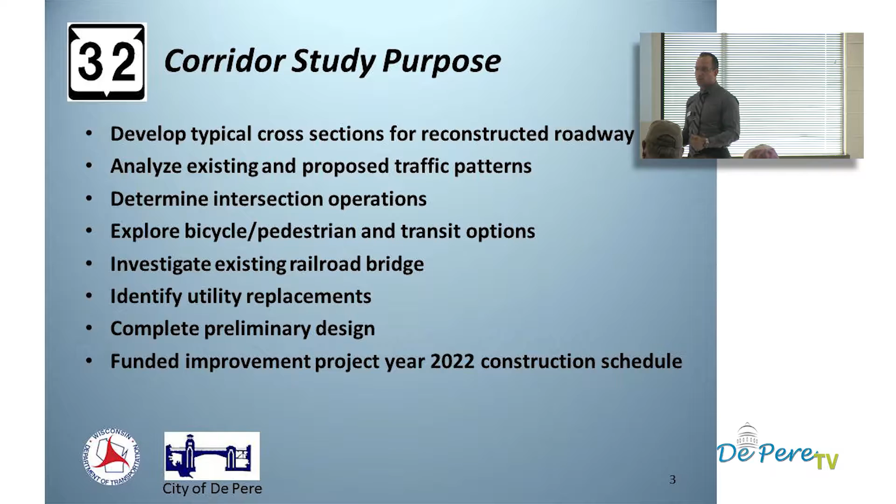I put this slide in here to identify, in an overview format, what we have done so far, just to gather some input. Because a complex urban design and transportation design in general has a lot of facets and a lot of stakeholders that we ask to walk along with us, and in order to find the right solutions, we have to incorporate a lot of their input, especially in a long-term reconstruction project like this, that we're expecting to last for a good long time. So the intent of the slide is just to remind you that there are trade-offs associated.

Go ahead, Brian. Can you kind of just read around the... Yeah, no problem.

Some of these project considerations we wanted to talk about are like the issues I mentioned when discussing why we needed this study. Parking is a lot of value, real estate impacts we have to have a good handle on, traffic operations, downtown identity, like when we talk about the railroad bridge potentially being a gateway into downtown, bicycles and pedestrians. The city has their bike plan that we should definitely consider in our transportation improvements. We have safety issues, we always try to do a 5-year crash analysis to hammer down the contributing factors to each crash. We definitely look at costs and livable community. We know we've got a mix of residential with our business district downtown, so we have to really consider the users in this.

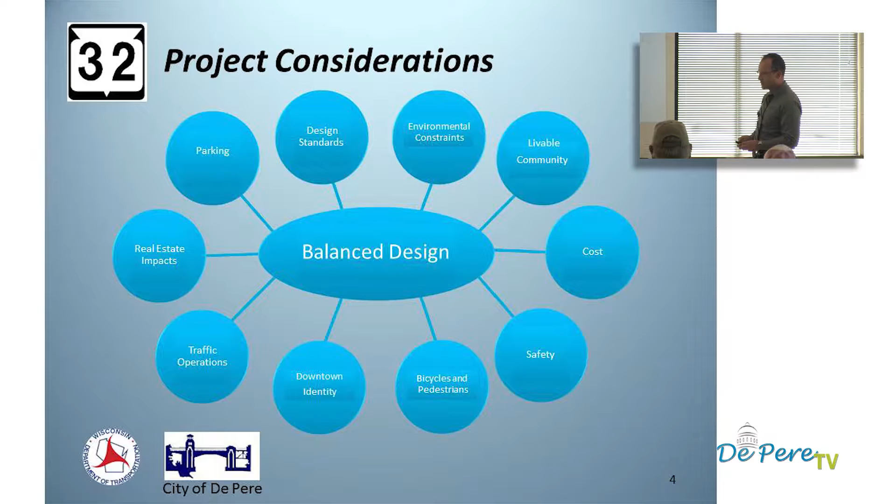Then we've got environmental constraints. There's always going to be issues like hazmat, issues like parkland, which is publicly owned land that maybe the city owns or things like that we have to consider. And then design standards: we have to make it safe for the design speeds, safe for trucks. It's a trucking corridor, so we have to meet lane widths and other design factors as controlling criteria. Combine them all, sometimes they compete against each other and sometimes they all line up, but either way your goal is a balanced design that serves the public in the best capacity.

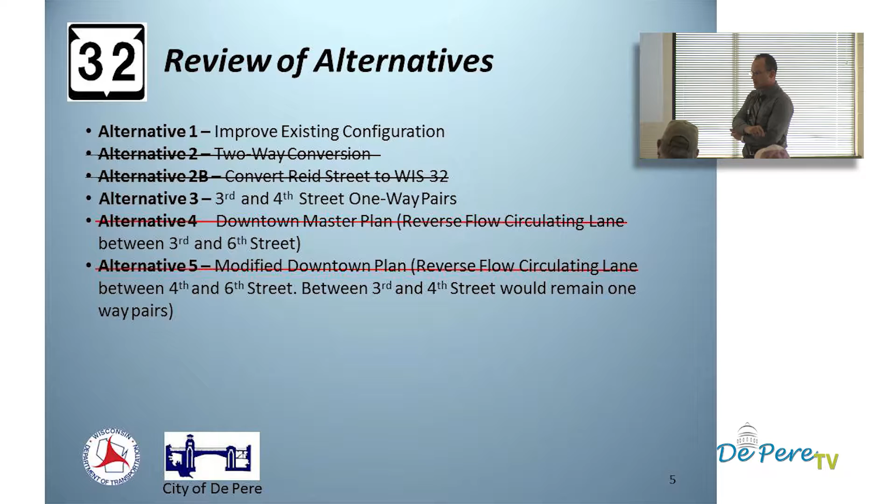When we came out to you last time, after the study kicked off in 2012, our first public information meeting was held in March of 2013, and we introduced the 5 alternatives that would be considered as part of the study. Alternative 1 was improve the existing configuration. Alternative 2 was a 2-way conversion of Main Street to Highway 32, with Reid Street becoming a local street. Alternative 2B was convert Reid Street to Highway 32, with Main Street becoming a local street. Alternative 3 was making 3rd and 4th Street one-way pairs.

In other words, northbound traffic would utilize 3rd Street, and on 4th Street, southbound traffic would primarily occur as a one-way. Alternative 4 was a downtown master plan showing a reverse circulating lane, trying to get one lane of traffic in the block between 3rd and 6th. Then we had the modified downtown plan, where the reverse flow lanes were only between 4th and 6th Street, and 3rd and 4th between those streets would remain as one-way pairs.

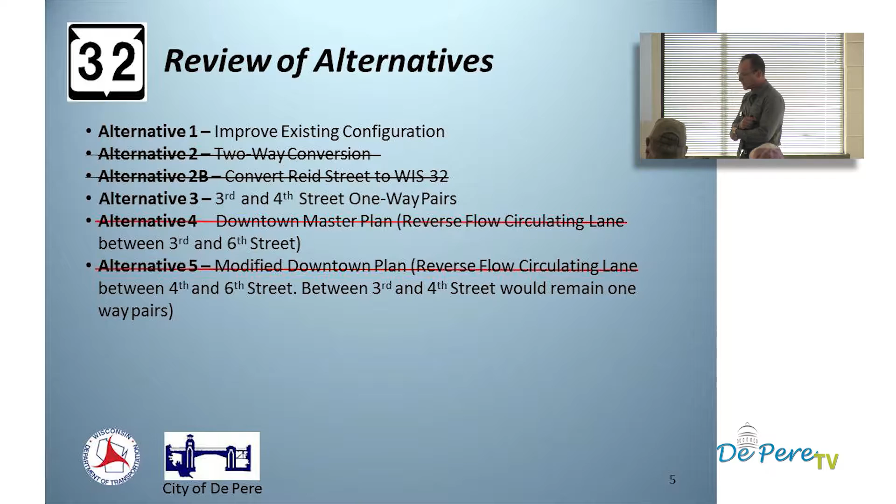I apologize, the slide did have the removed alternatives crossed out, so let me step through those with you. Alternatives 4 and 5 were recommended for removal after further study and stakeholder discussions, followed by a planning commission meeting in August 2013. It was decided primarily because of safety and operational concerns—alternatives 4 and 5 removed too much of the on-street parking compared to the other alternatives presented. The impacts were also pretty great, as there was some real estate needed as far as buildings went. That's when alternatives 4 and 5 were removed.

Then in October of 2013, after more design work, we met with the Planning Commission again to present the 2-way conversion of Main Street. At that meeting, the Planning Commission recommended that we remove alternative 2, converting Main Street to a 2-way roadway and making Reid a local street. However, when they dismissed that alternative, they came to us with a secondary proposal they wanted us to investigate: converting Reid Street instead to the Highway 32 corridor and vacating Main Street back as a local street.

So from the time we met with them in October 2013 until we went back in February, we had alternative 2B on the table. Then, in February of 2014, which was our last outreach with the Planning Commission, Alternative 2B was presented and had equally high impacts on Reid Street by converting it to 2 lanes. I believe a lot of the intersection at 3rd Street had significant real estate impacts.

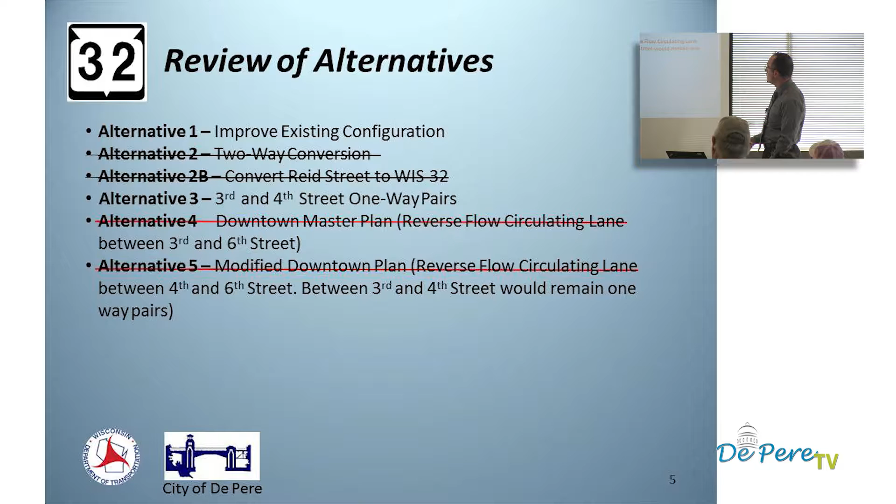Oh, this is the slide, sorry. This is the better one. I didn't realize that I inserted both of them, so I apologize. But this one shows that they've all fallen away except for alternative 1 and 3. So I'm going to give you now a good overview of what alternative 1 and alternative 3 are.

When we say the study segment starts on 8th Street over to 3rd Street, I just want to stress that the alternatives are primarily between 6th Street and 3rd Street, where we're in the one-way pairs segment. So tonight I want your comments primarily for the alternatives analysis to be reflective of which one you prefer.

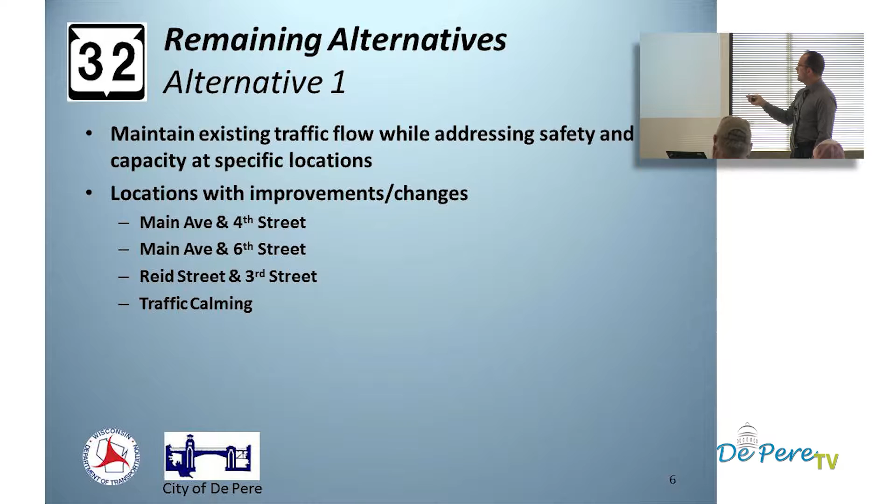Alternative 1 or alternative 3 - we're calling alternative 1 maintain existing flow while addressing safety and capacity at these intersections that have some issues for operations. Those locations I'll spell out: Main and 4th Street, Main and 6th Street, Reid and 3rd Street, and the concept of traffic calming that I'll go over.

So basically, operations, as I step left to right, we are proposing at 6th Street to add a left turn lane that does not exist today to the intersection for operations. We're proposing, I believe, another left turn lane that does not exist today at 4th, and I believe there is a right turn lane that is proposed on 5th and Reid.

I believe there's a left turn lane in 3rd to 4th Street that is proposed, because this segment between 3rd and 4th has the most operational delay on the corridor. You'll find that when left turning vehicles or vehicles headed northbound come through, particularly in the AM peak, the backups are quite considerable in the 3rd to 4th Street segment.

So in improving general operations, those are the turn lanes that are added. More specifically, another feature we're looking at is narrowing the lanes. Currently they're 12 feet, we're going to narrow them down to 11-foot lanes.

We're going to do some features called bump outs at pedestrian crossings that give a visual feel of narrowing the roadway a little bit. Parking lanes are narrowed slightly throughout the corridor. Currently, Reid Street and Main Street have uniquely different typicals.

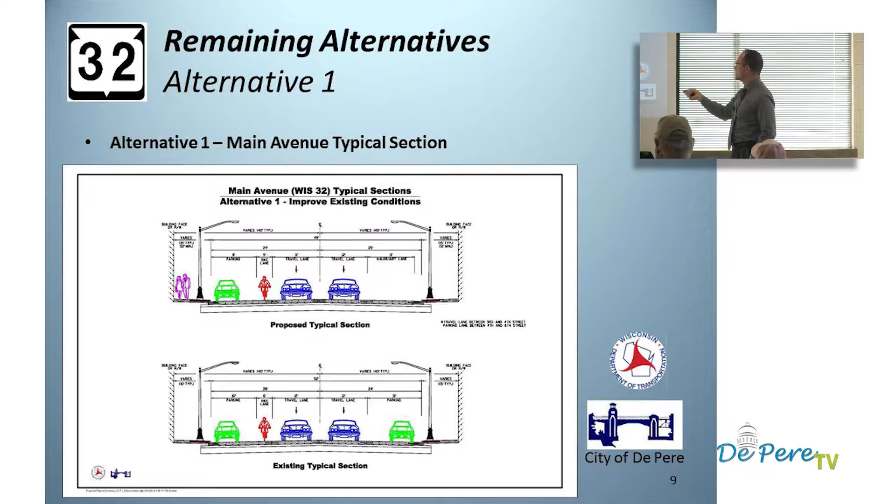You can kind of see, if I pull it up, I'll go back to that slide. You can see one has a 52-foot existing - this would be Main Avenue - and we are going to go down to 49 feet. So we're definitely narrowing up the roadway. And then Reid Street starts out at pretty much the same, it's 46 feet, so that's more in line with what we need.

Right now, Reid Street does not have bike accommodations. Because of the one-way pairs, we do want to get bike accommodations on Reid Street also, and there's enough right-of-way to go ahead and do that as well.

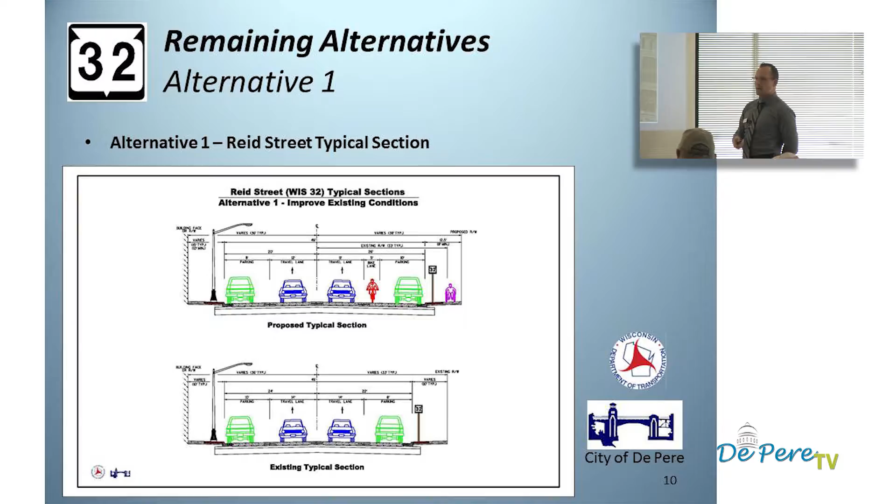So another unique aspect of the improved existing conditions is a conversation that the city... I'm going to answer questions. I just have one question, I have to leave for another meeting.

Okay, I haven't seen it on any of the drawings - have you figured out the possibility of putting angle parking on the streets? Because the way I pace it off, I think you could get another 2 to 3 cars on each side.

I don't know that we've had angle parking on a state trunk highway. I don't know where... well, it's still not just a city trunk highway, it's the main drag. Brian, why don't you continue the presentation? Okay, I'll get his name and number and we'll follow up with them on the phone. Thank you, Mark, I appreciate that. Okay.

In outreach with stakeholders, one was the Expera Mill. The city and study team have had conversations on operational improvements at 5th and 6th Street that would be part of the improve existing conditions alternative. Right now mill traffic comes up 5th Street and enters right here, which creates some backups and concerns.

There's a left turn lane being installed on 6th Street that could improve overall circulation if the mill works with us to take their access back off of Fort Howard, 6th Street, a bit north of the intersection. This would primarily become a driveway for adjacent properties instead of a through entrance for mill trucks and employees cycling in and out during shift changes, which greatly affects through traffic and operations.

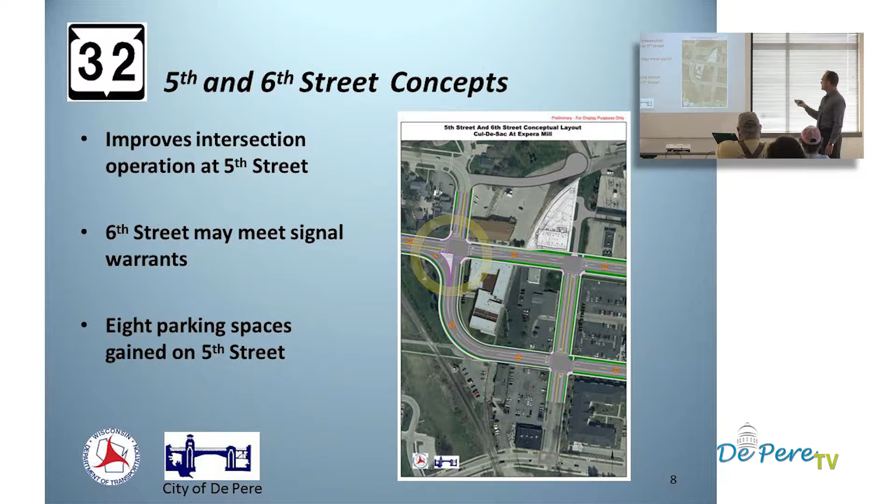The intersection of 3rd Street was also evaluated for signalization, primarily due to pedestrian movements. But that is more related to the next alternative, so let me skip ahead.

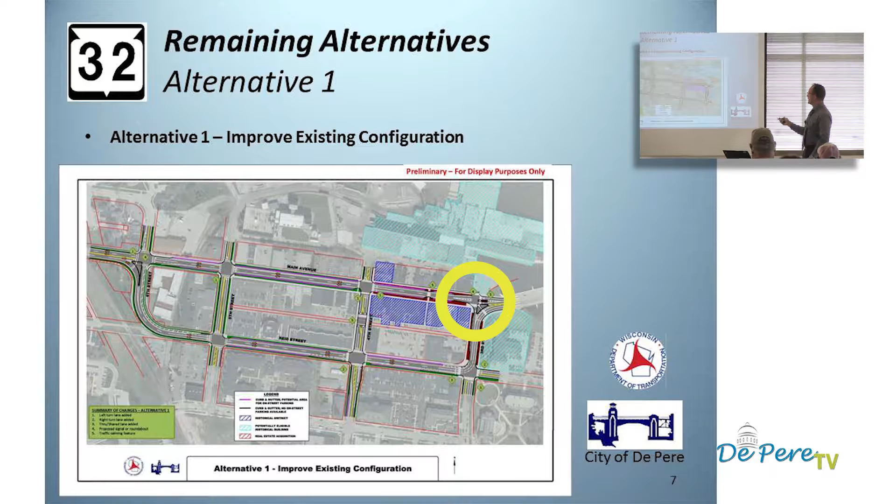Those operational improvements are primarily what would occur through the reconstruction segment. No other traffic pattern changes would exist with Alternative 1.

Alternative 3, however, is improve operations and safety within the existing footprint, but with some directional changes in traffic: 3rd Street would become one-way northbound from Grant to Main, and 4th Street would become one-way southbound from Main to Grant. There would still be the same improvements at Main and 6th, Main and 5th, Reid and 5th, et cetera, along with the same traffic calming measures like bump outs and lane narrowing.

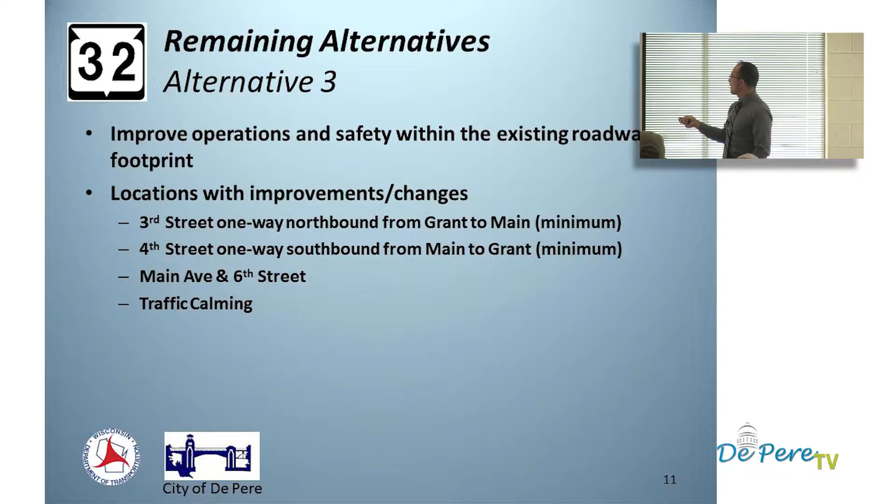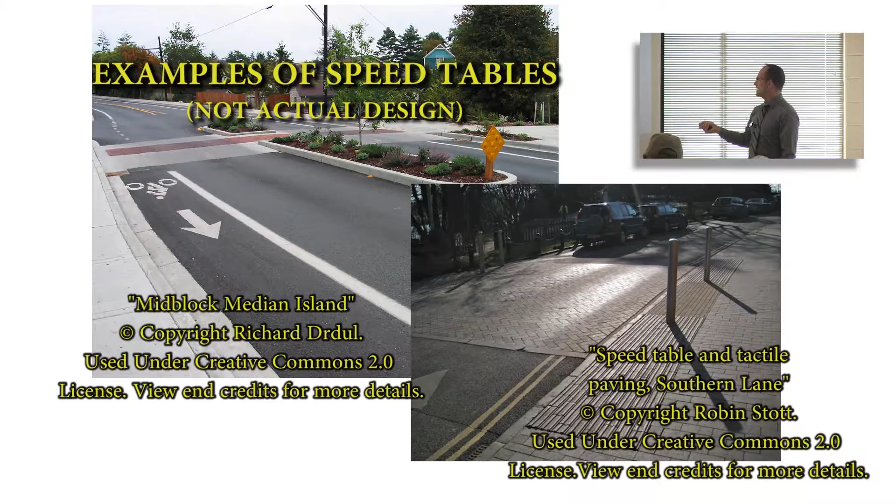The city is also thinking about installing what's called a speed table. You drive up over it, and it makes it harder for traffic to accelerate faster than the posted speed. It's also a better location for pedestrians to cross that busy alleyway that goes between 4th Street.

With these traffic pattern changes on 3rd and 4th Street, we have to consider what they mean for overall operations and safety. First, they make it a lot easier for pedestrians at the Main and 4th Street intersection. You'd still need this turn lane operationally, but because there's no longer a northbound cycle coming up 4th Street, it would improve operations in this segment, which currently has many delays and pedestrian safety issues.

One pedestrian safety issue: currently the crossing is right here, and there have been near misses with pedestrians crossing in that location. We're proposing to move the crossing to the east side of the intersection, so traffic in the left turning lane can judge traffic coming over the bridge at a good clip and navigate without being put into direct conflict with pedestrians, since often drivers look right, pull forward, and then there's a pedestrian there, creating issues.

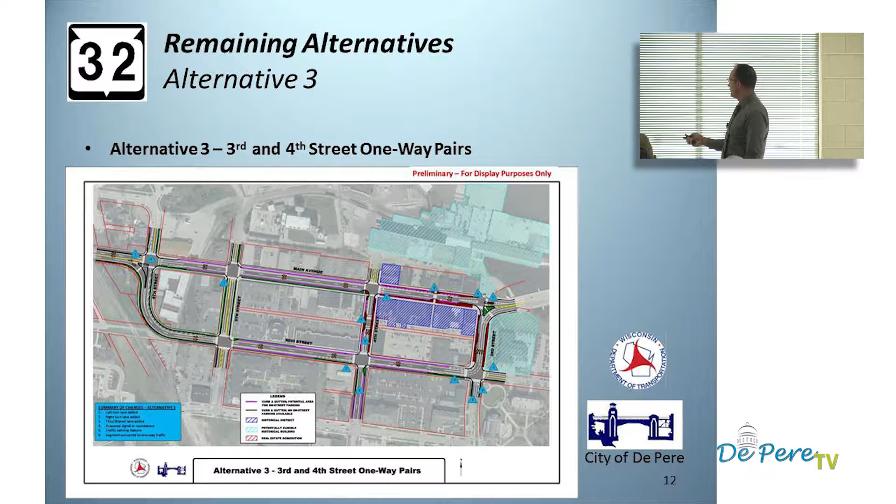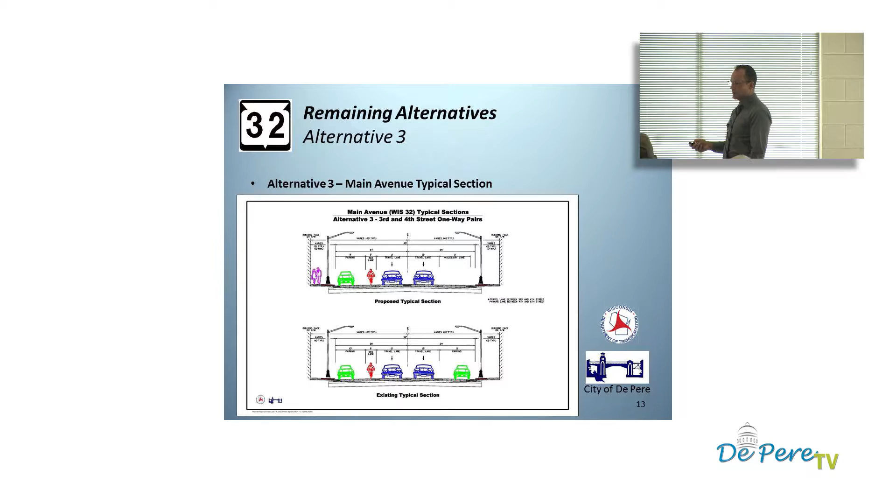So you have the same proposed typical section changes that I talked about last time on the other alternative. But unique to alternative 3 is a bigger picture that I want you to consider tonight.

If we do find that there are operational improvements in the downtown area with the one-way pairs, if they're favorable with the outreach we're doing, and if they're favorable with larger stakeholders like St. Norbert's and the property owners, the city would make efforts to extend the one-way pairs in the city limits down to Lost Dauphin. Kevin has analyzed our traffic, and right now there's about a 2/3, 1/3 split for AM and PM traffic.

In the mornings, traffic is always primarily 2/3 headed northbound on 3rd Street, and in the PM, the same 2/3, 1/3 split exists on 4th Street.

It's always been a conversation, and I think in April of 2013, we met with St. Norbert's. They've always had an intention to try to close off traffic if they could on 3rd Street, because they're concerned with speeds through the campus and a higher volume of traffic as well. We've had conversations with them about the 3rd and 4th one-way pairs.

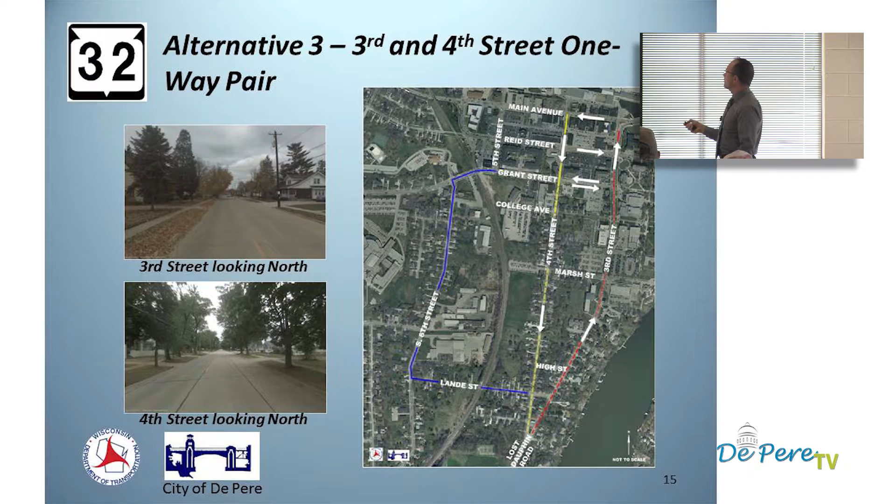So that is primarily the two alternatives we can talk about. After we left the Planning Commission meeting in February of 2014, we really were digging our heels in on analyzing the railroad alternatives.

So basically we looked at 4 alternatives, and I have them laid out in the order they were looked at, kind of in the order feasibility fell away. Alternative one, which you can see closer in the open house format, is to maintain the existing bridge with the addition of a multi-use underpass for full access for bikes and pedestrians.

Alternative 4 was an at-grade crossing, meaning we'd remove the subway-type situation that exists today and make it an at-grade crossing. All of our alternatives tried to raise the vertical clearance of the structure, since it's only 14 feet right now. Preferred design would be 16 feet 9 inches for railroad clearance on a bridge if we were to reconstruct.

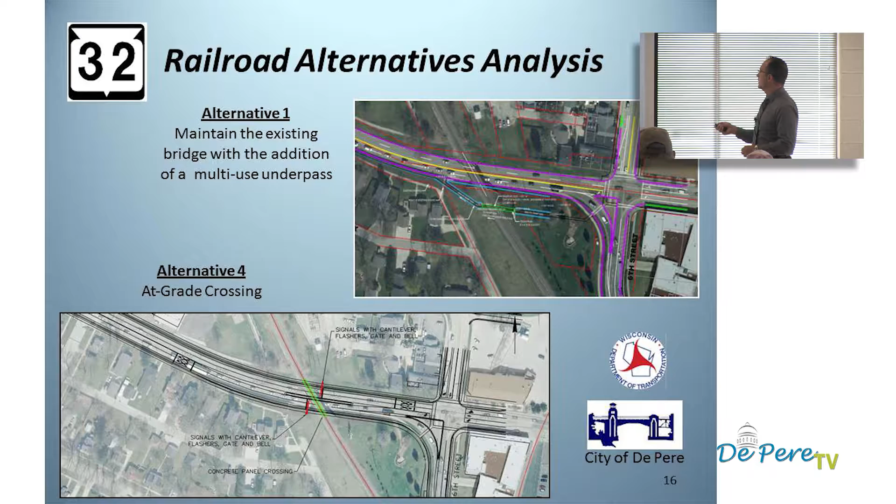Alternative 2 was trying to achieve that desired height of the structure with a 4-lane typical section, using a shoofly bridge alternative, which basically builds a temporary bridge off alignment and then builds the permanent structure on the same existing alignment. You have the throwaway cost of the temporary structure that you have to remove.

A permanent offset alignment — basically, the alignment you're building offset is actually what the rail is going to use; you're building right next to the live railroad, and that alignment becomes the primary route. It does have a little more impact, in that it goes back a bit further.

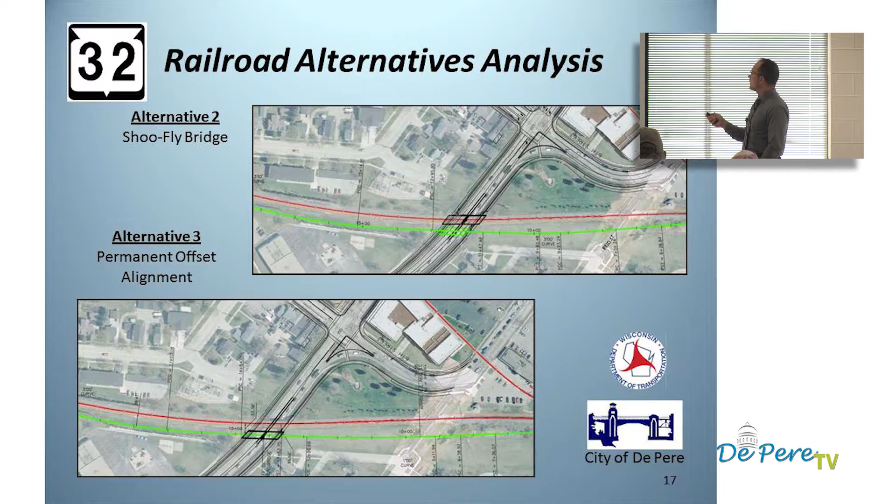So I just introduced those alternatives so I could speak a little more to the level that we analyzed each of them. When we looked at these alternatives, we basically did a cost-benefit analysis, which is a technical term for an industry standard of looking at roadway and rail costs in an economic setting, where you can put tangible dollar amounts to things like safety, operations, and delays.

Some of the costs that are looked at are construction costs, user delay that can be assigned some value, and operational costs during and after construction. We can also assign values to crash reduction and safety improvements. So it's pretty easy to understand how large values could be attributed to the safety negativity of an at-grade crossing.

So alternative 4 and alternative 1 were easily dismissed early on as unfeasible. Alternative 1 primarily because we couldn't actually get 4 lanes of traffic under the bridge. Alternative 4 because going to an at-grade crossing would mean substantial delays to traffic as trains came through, and if there was a safety concern, those impacts add up to considerable costs.

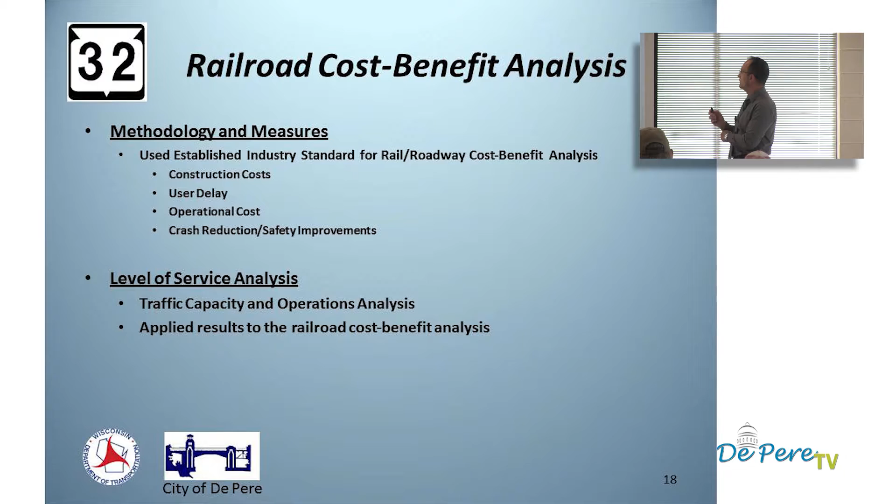The cost-benefit analysis is looking at basically any ratio that's less than 1 in a cost-benefit analysis as showing things are less economically... what's the word I'm looking for, Jamie? Economically feasible or economically desirable. And all of the alternatives that were looked at did have economic cost-benefit analysis numbers that were less than 1.

The 2 alternatives that probably rose to the top as most feasible from a construction perspective were the shoo-fly and the permanent offset alignment. The permanent offset alignment was probably the most feasible, as it had a construction cost of $7.6 million.

And we feel like we can somewhat solve any issues that pop up with adjusting signal timing and cycling platoons of traffic through there, rather than spending almost double the project costs -- because the entire segment from 8th Street to 3rd Street is about $7 million in construction costs just to reconstruct the roadway. This railroad bridge would be another $7.6 million on top of that, so that's double the costs.

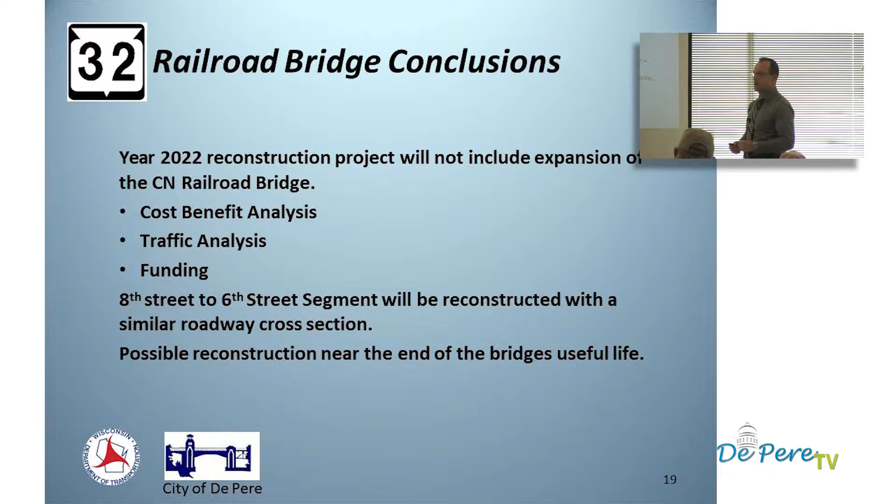So you will see at the end of the presentation, I'll leave the display up. We don't have an actual display of the 8th Street to 6th Street segment. I just have a PowerPoint slide, but it basically shows that from that segment we are reconstructing the roadway over there. We will make some profile improvements that may slightly benefit the railroad vertical clearance, but primarily it will still be under the desirable height.

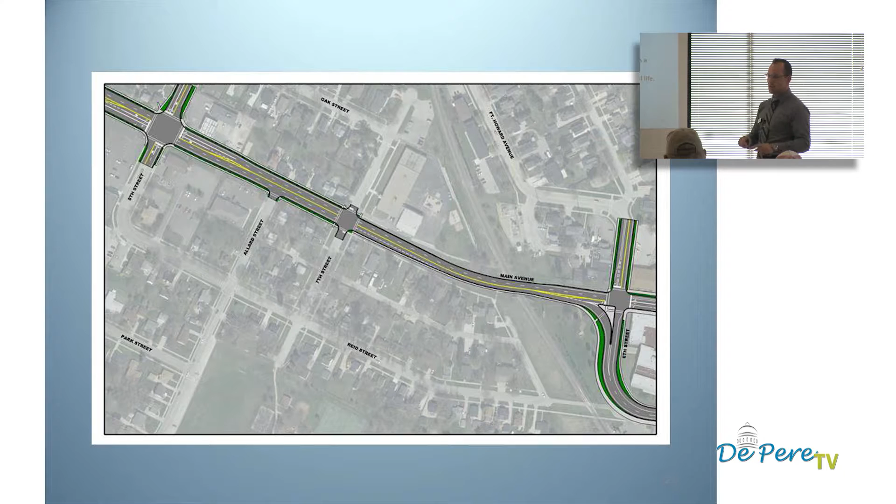We are making some operational improvements at 8th Street because the entire intersection is being reconstructed. The segment that's on 8th Street that heads out to the Ashland roundabout, that segment is actually being reconstructed in 2017. This fall, the city's coming out to do their utilities.

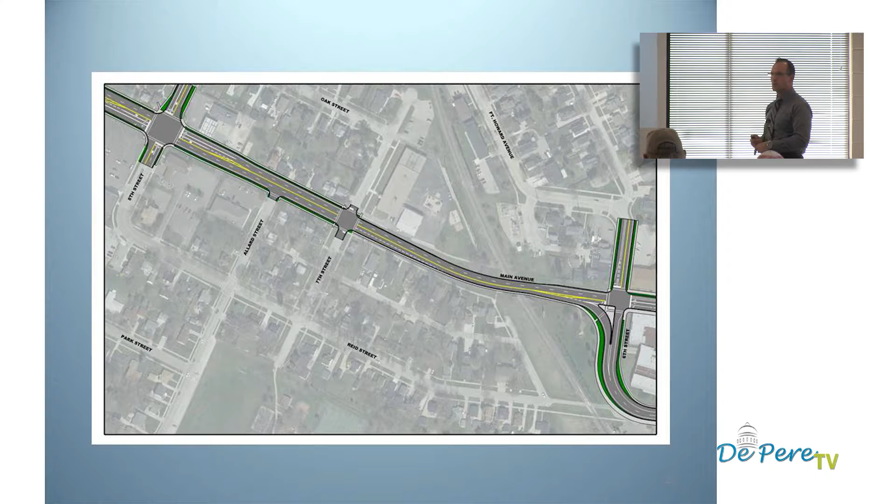The projects actually were at one time together, and that one moved forward a little quicker than this one. About 5 years later, we'll catch up, and 32 will be reconstructed on this segment. So, like I said, I'll leave that display up at the end. But basically, that said, the reconstruction segment, we're looking for comments to be returned to us by June 24th.

If you look, I think you can fold the comments over, and they're actually a prepaid mailer. Try to use some of the real good facts that are in the matrix to kind of answer some of your questions, and you can preface your comments on that. Fold that and try to get it back to us a month after the PIM.

I put June 24th. There's also contact information in there. I've got an email address and contact information for Eric, who's with the city, if you want to contact them as well. But we'll try to get all the public comments and stakeholder comments together to make some decisions.

We'll try to work with the city to come to a decision on that preferred alternative design this summer. I know we'll probably, Eric, our group, our study group will probably do some outreach with the mill again. We'll probably do some outreach with St. Norbert's. There might be some more outreach we do with regard to some residents. But we'll try to come to that decision on what the preferred alternative is for downtown this summer.

Then we'll try to strive to do a 30% plan review, plan submittal, and that's basically that preliminary design that I talked about that kind of launches us out of the gate to meet that construction schedule. We'll also prepare a draft environmental document that will basically document all of our alternative analysis, and it will cover all of the impacts that the preferred alternative has in great detail.

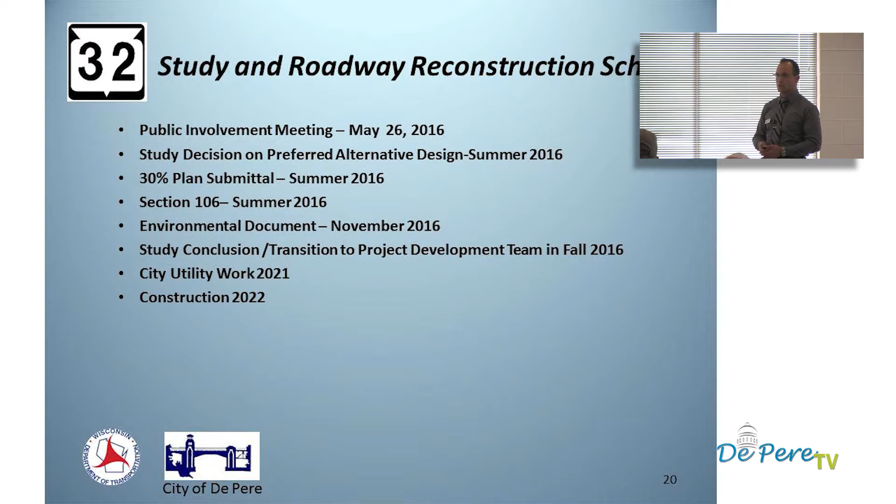So I draw a distinction that the planning study, public involvement meeting efforts are kind of concluding now, but this PDS effort in the next 4 to 5 years to achieve the actual reconstruction design will pick up another public involvement facet, and certainly all the residents and all the businesses will be part of a conversation that is occurring for the reconstruction project. So if nobody has any general questions, I'll open it up to general questions.

Go ahead. I'm just wondering, in your analysis, your initial work, have you had any conversations with the business owner? Yes, we have a stakeholder group that includes primarily chamber members.

Definitely De Pere is in there. We've got residents that are in there, and we have. I know at one time, like right when we first kicked off the study, we were actually going door to door, going and talking to businesses, getting some of their ideas. We did postcard surveys. We spent that time just walking door to door and talking a lot with them.

We have a really good feel. Kim being tuned into the economic development end of things, being the planning director, she's tuned into the parking issues and the alleyway that occurs to the back. So those conversations about, well, what does this construction mean to us.

Those are really up her alley, what we're thinking about for this downtime of construction, and what best serves the business climate of drive-by and destination businesses and economic development. So, yeah, you're very welcome. Go ahead.

I haven't heard anything mentioned about the railroad siding that runs next to 555 Main Avenue, next to the condos. It runs right through there. I live right next to it, so I'm very tuned into that siding. Right now, there's a tremendous amount of noise from the engine blowing their horns right by the buildings, 8 feet away from my balcony. They blow the horn all the time. We're obviously concerned about the noise going across the tracks.